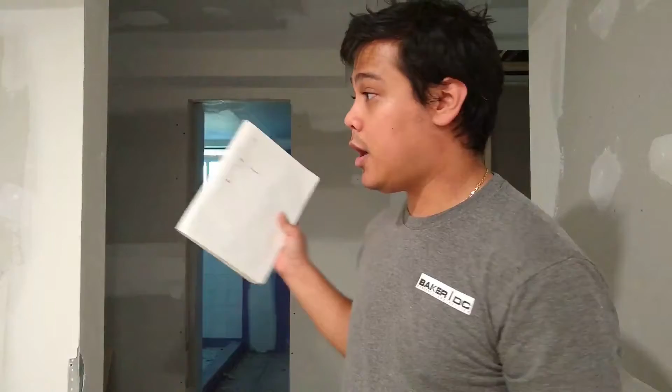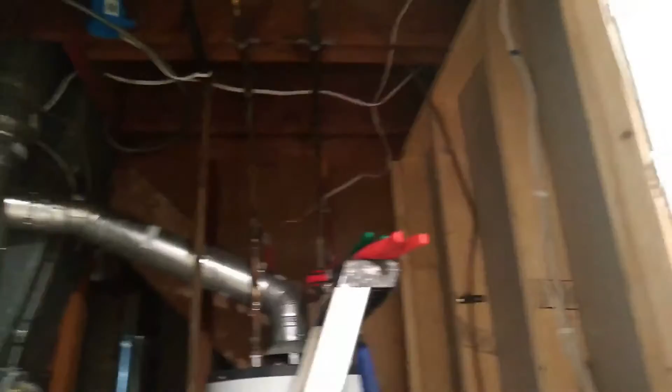The hope today will be to get the other half of the rooms, which are circuits 9, 10, 11, and 12. We're going to splice into this line right there where it crosses. We're splicing into that.

Do not use this as a reference. I am not a licensed electrician. I am not a legal advisor on this type of field. I simply worked in the field for a year, and I had a formal teaching on it, but I'm not any certified person. But this is what I understand. I've had people confirm this for me that are licensed, that are in that field today currently. So do not take my word for it. Do the homework. Call or consult your local electrician, and if you are not comfortable or if you think I am the answer, do not.

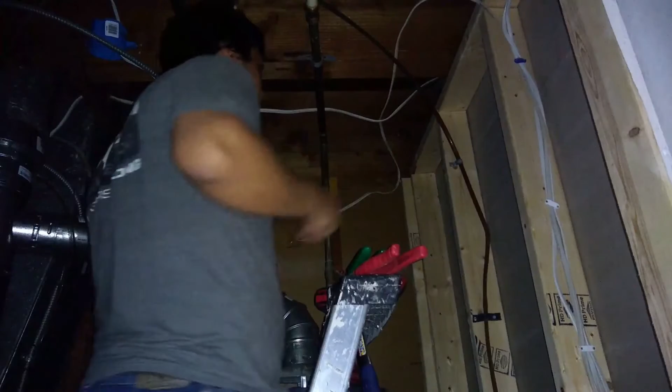Also, if you're going to work on anything in the dark, have a headlamp. I don't have one, and I should get one. Just don't follow the advice of an amateur DIYer, homeowner, whatever. Don't do something you're not comfortable with. Line is dead, and I confirmed earlier that this is my line. So, enjoy a montage of me cutting up wires.

I just cut the wrong wires. Or I shouldn't say the wrong wires. I just cut the three-way wire for the outlets, which tells me power is going in here somehow, somewhere, which means I did not pick the right cable. And now I'm curious, so we'll be back.

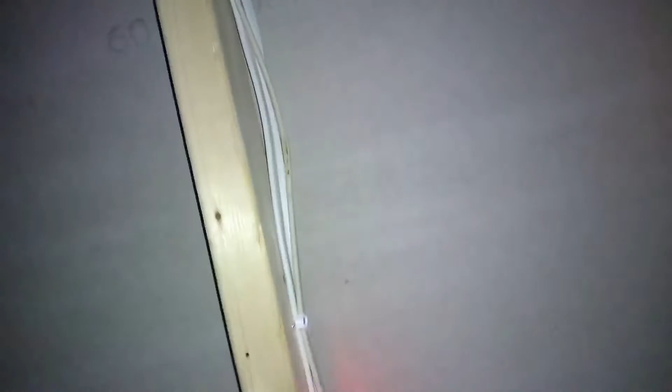Alright, update. So, I just found out this is working. The splice is good. Well, the splice itself actually works, because here's my extra cable that I'm getting power from. Right? Problem. Somewhere in here, it's nicked.

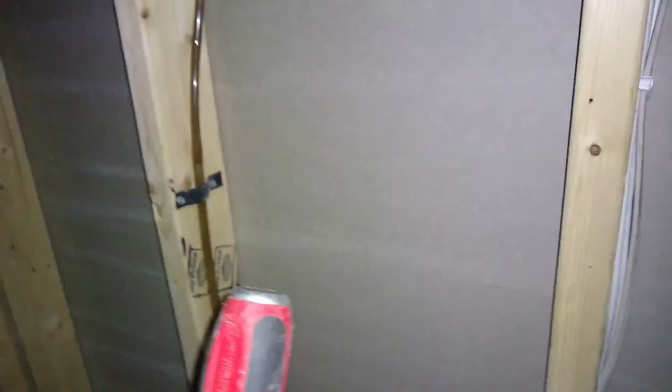So, now comes the part of troubleshooting this garbage of my work, because I'm pretty sure it's just this wire is short, like has a short of sorts. Worst comes to worst, I'll run a secondary wire to that box just to save myself some time. To the light, I mean. So, yeah, let's get to it.

So what am I doing? I am testing a theory. I think I might have pinched the wires too tight. So here's to hoping I don't screw this up. Let's take you for a trip. Plus you give me some lighting. Okay. Light works. We're gonna see if there's power here. There's power. Which means this should have power.

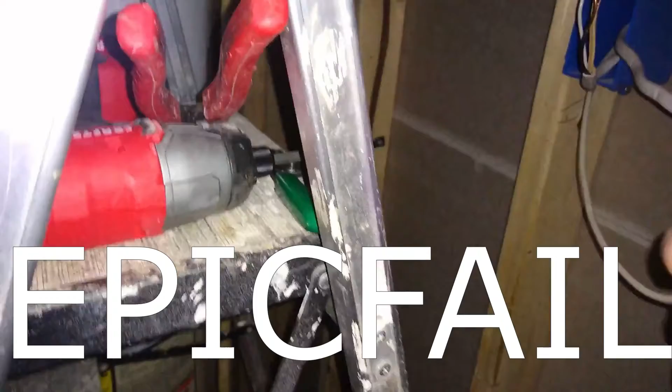Oh. It did? I'm not sure. I'm about to find out. Come back to life. I kinda need you. No. Okay, well, the idea was that it was probably pinched too hard. So.

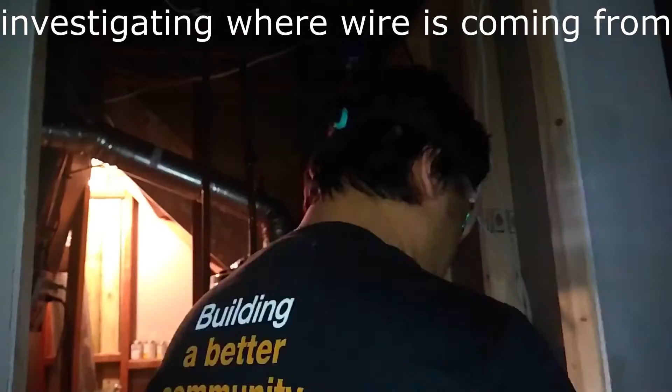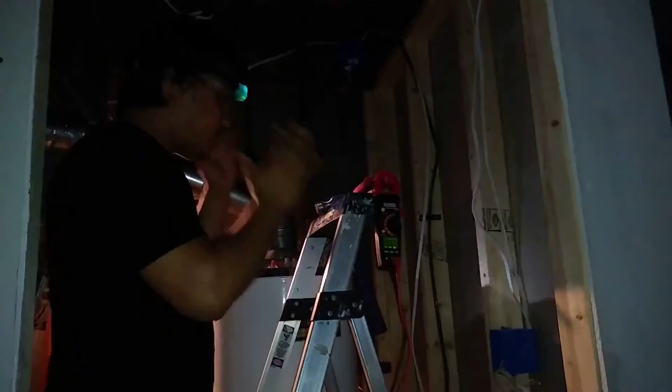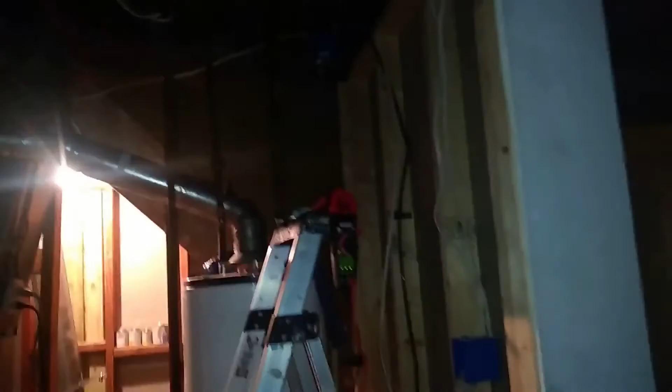Okay. Okay. So, it makes sense. And it just clicked to me. Because, I'm so stupid. Well, hopefully a 15-foot run, this will still make it. If not, I will have effectively wasted 15 bucks on wire. So, I know where the three-way goes. The three-way goes in here. Now, you think that that's that wire, but in fact, it's not.

I had been trying to figure out where this three-way was going. And I've been trying to figure out why I was getting 24 volts. I'm thinking, voltage drop, that doesn't make sense. Why would I get voltage drop? Why am I missing out a whole 100 volts? And it clicked to me finally.

The reason I'm missing 100 volts is because there is a light in here that gets converted to 24 volts. So where that power is coming from is coming off of a converter pack that's actually powering these lights here. That's how they're getting so small power, which, A, that's great. I don't have to worry too much about that. But B, I now know that that's where it's coming from.

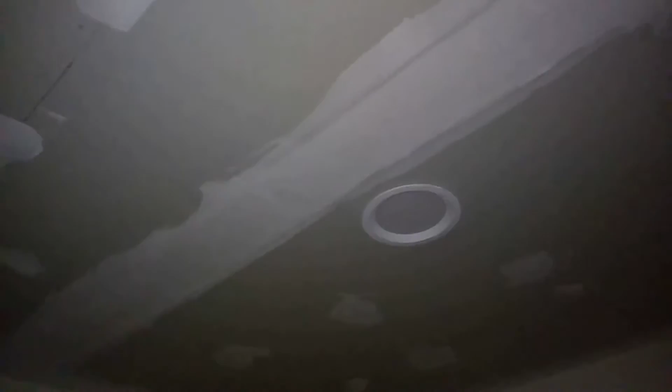It would make sense why I'm getting 24 volts. Because, well, I think it's coming off of a pack there. I'm pretty confident it's coming off of a pack. So.

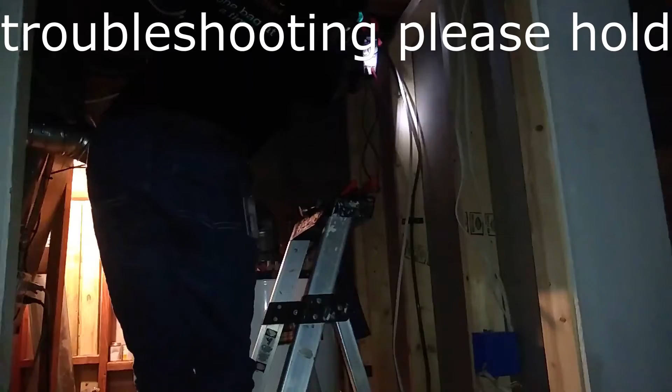Alright, update time, finally, because I'm done, and I know I didn't record it all. It's basically what I was doing to this wire, but I did it to another wire, and I'll show you where. Otherwise, we closed up this junction box because that was pushing a low voltage to a power pack somewhere else, which didn't make sense.

These lights don't run off of 120 exactly, they're running off of an inverter. So yes, you still power them up with a 120 volt wire, to whatever amperage you're using. But they have inverter packs inside the ceilings that the wires connect to, and they just step the voltage down, which explains why I was getting 15 volts on hot and neutral, and 24 volts on the hot and ground.

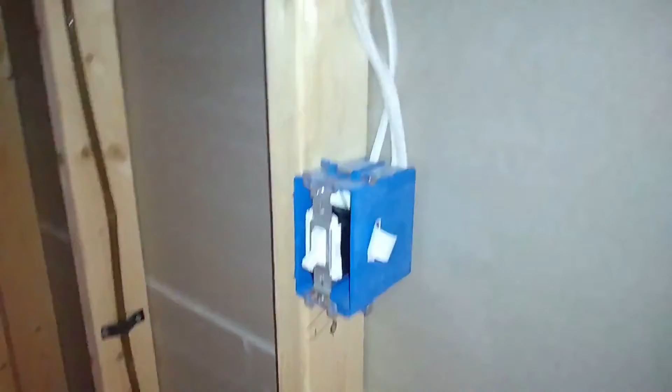So what I did was come over here, I got my wire that I needed, spliced into it, pulled the wire all the way into this little junction box up here. As you can see, it runs down. This now also powers the light that I'm going to put up here, because I need light in here anyways. But this now also traces all the way out here, as I suspected.

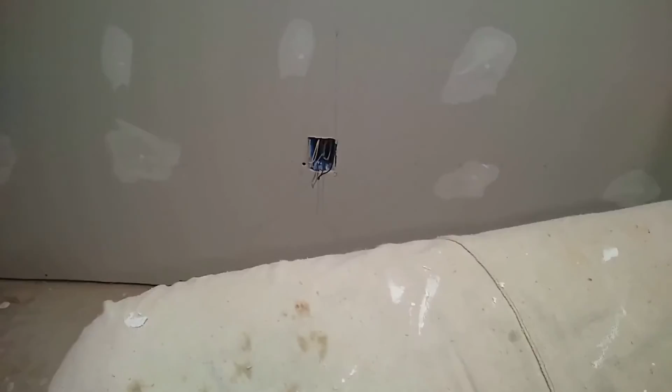This line, it didn't make sense why there were more neutrals and more hots in there than it needed. That should have been a dead end, but instead what I guess the contractor was trying to do was run power from that one line all the way around and then into here, which made no sense, because that's just doing way too much wires.

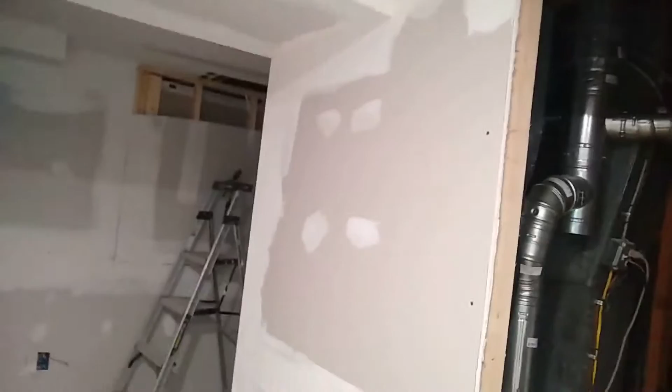And honestly, I'm very disappointed. I wish this would have been better thought out. You see the drywall, you see the patchwork. This was all opened up. Why that wasn't thought through, I don't know. But I'm not going to continue ranting. I'm not an electrician, but even I know to always pick the shortest path if possible, just to keep it simple. As the phrase goes, keep it simple, stupid.

So, yeah. This now, just for proof of concept, right? Where's my voltmeter detector thingy? Or as some people would consider it, glow stick. So this should be hot. And just so that you know, because you're probably thinking, is this on? It's actually in the off position, but just so you can see, there is no current, right?

Nothing. So when I flip the switch, now it's got current. So that also just validates, okay, this isn't off of that switch to power this, thankfully. I'm gonna put it on my little stand here. Realistically, I don't even know where I was going with that.

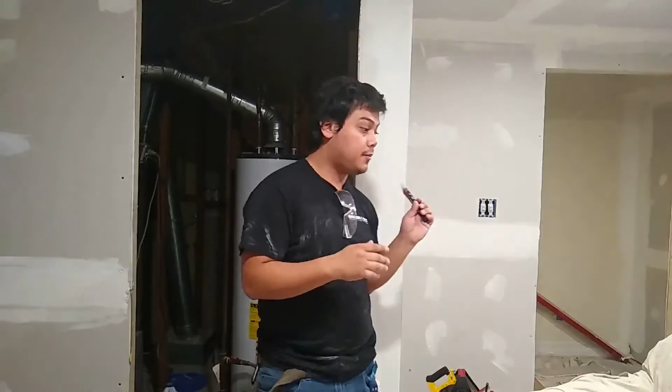Now I remember. Basically, you just want to make sure, as a rule of thumb, and maybe I should have a diagram drawn for this, but for anybody looking to do something simple, like what I did was pull wire, splice into other wires, and that can get very nerve-wracking, and it might not be the situation for you. You might just have an end wire, kind of like this.

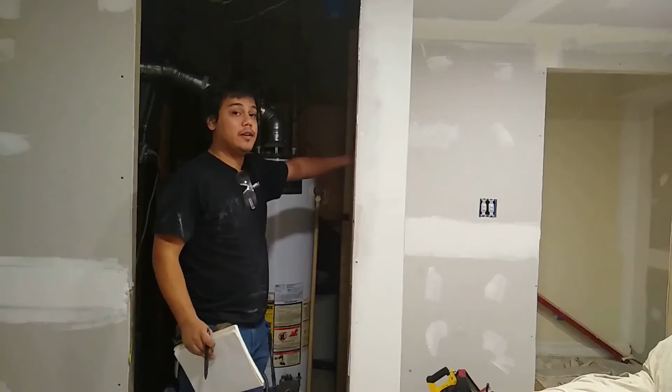Let's say all that power was running here instead, from the back over here, and there was just this end, and you're trying to make sure that you're not toggling power elsewhere that isn't for a light. Let's say I have an outlet from here down, and you're not sure how to power it. It's not as difficult, right?

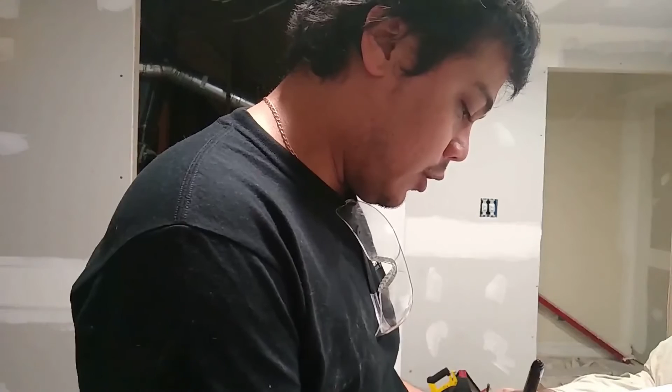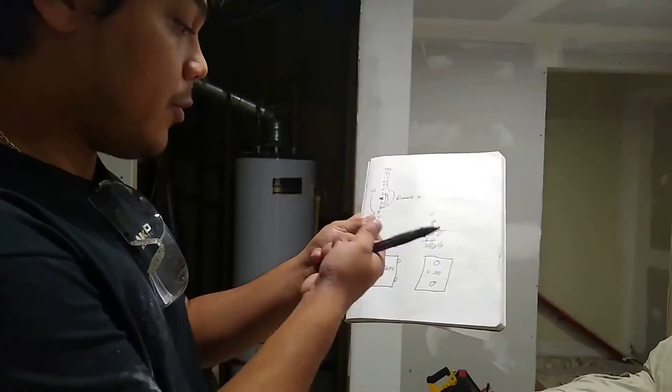We'll do 2 squares. I'll do a little loop here, and then a loop here. That'll be my ground. Then I'll do another square for side representation. So front, side. I don't know if you can see that, so I'm gonna quickly look at the camera. So if you're looking at the switch from the front, the toggle switch that goes up, down, right? Excuse me.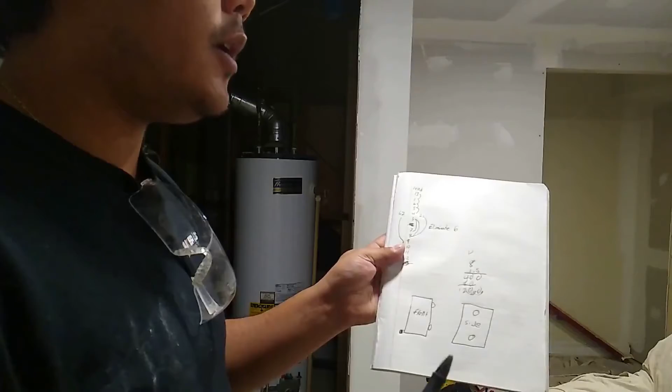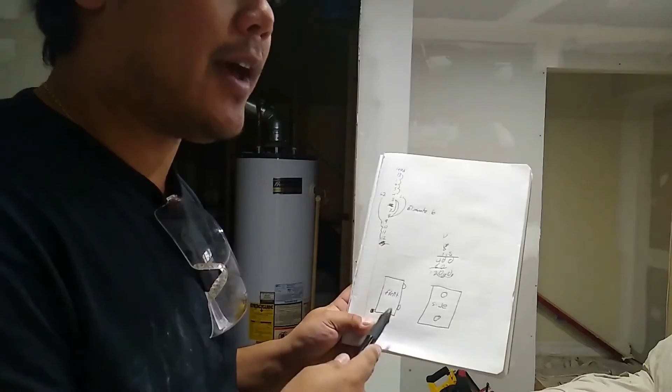General rule of thumb is that you always power top and then you go down. Now, before anybody jumps down on the comments, rule of thumb, always look at the box and just look for obvious signs. A lot of this equipment is fairly obvious to people like me. If I go to the store and buy a switch, it's gonna have obvious stuff.

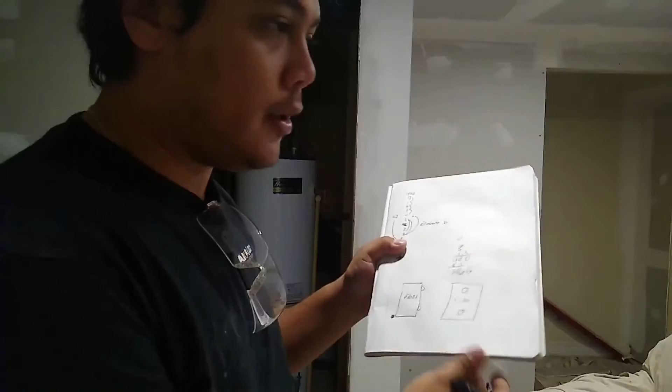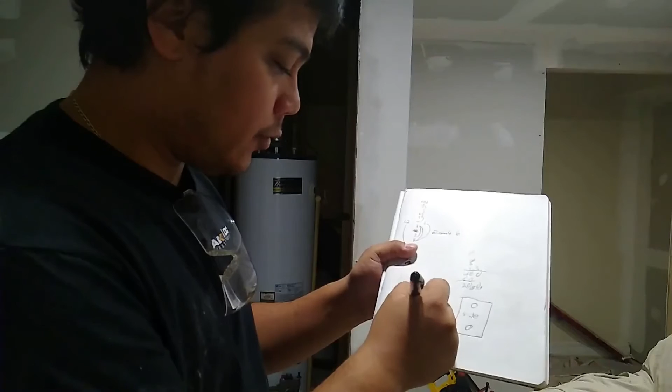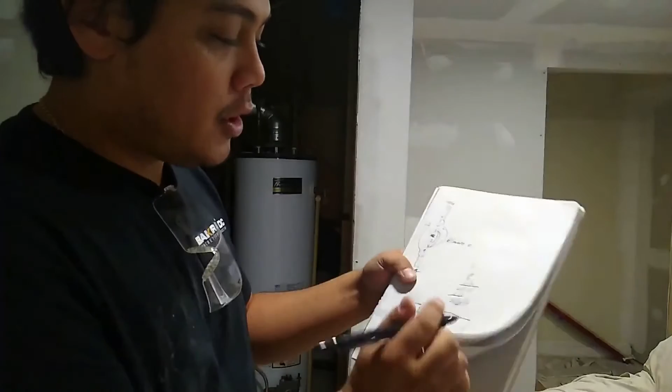For instance, an outlet will have brass screw tops, and that's usually the indicator to put the black wire to the brass tops, and that's for an outlet. For lights, not so much. Most of the time, there's a toggle, so when power is connected, you have your little toggle here. When it's down, the toggle doesn't connect to the other pin, but when it's up, it'll connect to that pin. So usually you'll just have your line come in here, okay?

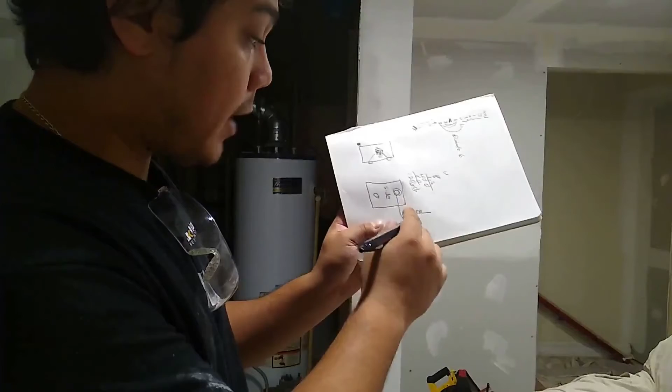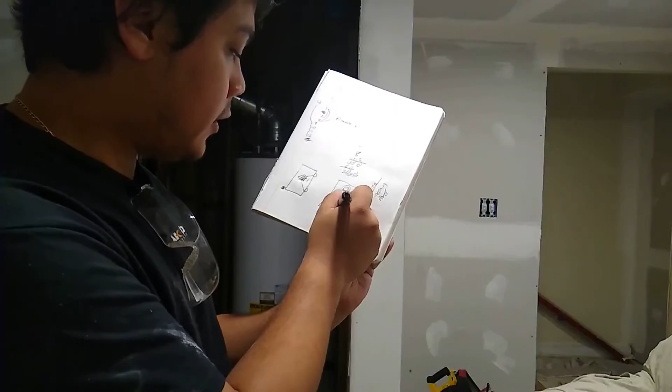And then that'll be your line, meaning that's power coming in or incoming power, right? And then you have this wire heading out, or your load or power sending out, right? And so this then gets controlled by the switch, right?

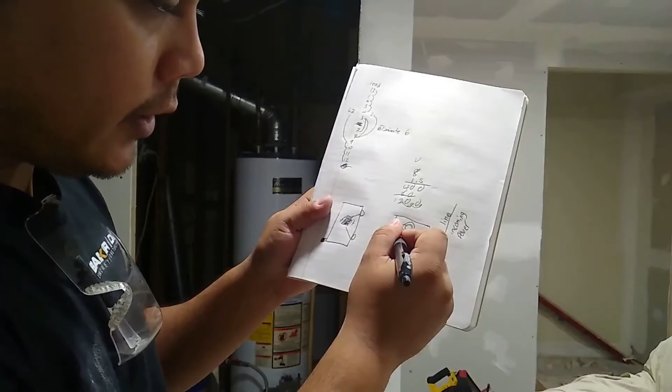If the switch is down here, right, it's not on, and there's a little bar. There's a bar that connects to it, and then another bar, and you can YouTube how a switch looks internally, so you can see how they operate for a better visual representation. But this is the best I can do.

I'm not the greatest artist, but basically when you flip the switch up, this bar here, let's say there's an imaginary bar here. Once you flip it up, it goes touching that contact and then sends the load, or power, out, whatever. And that'll control your switch. This isn't difficult. What we're mostly focusing on is this part, right?

You need to make sure that, let's say there's an outlet that you need to power and you don't want it controlled by the switch, you wire it on this line coming in. You can splice them together, or in some cases, the light switch has similar things. They have screws that you have to tighten down.

You can more than likely push it in, not to use the push-in, there's a sliding portion where you can put the wire through and then tighten it down with the screw, and then you can send this power to the outlet, okay? And that's how you basically wire power into a switch without having the switch control the outlet.

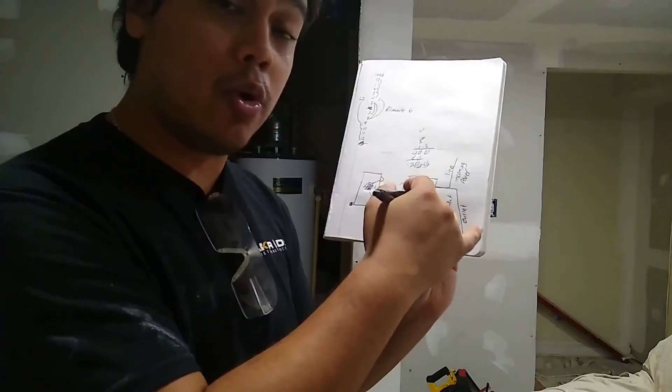And, well, I'm going on a rant here, basically. Effectively, I'm done. I can now call the electrical inspection for a rough-in check, and after that passes, I've basically just got to clean up the basement. I have a potential contractor. I don't know if it'll work out well. It's the hope, right? So I'll be sure to update you guys on that.

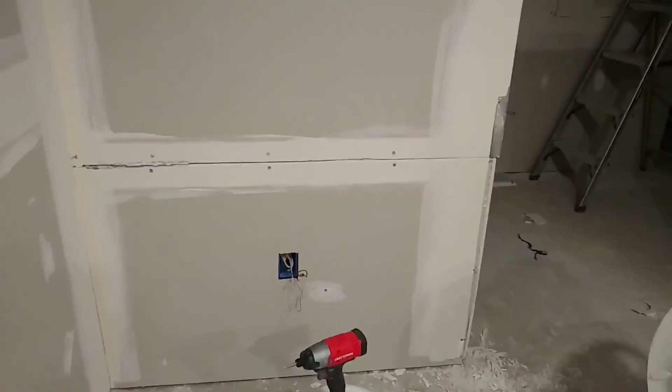I'm just going to take you off the stand because I want to move around now. This isn't the best securing, and obviously the holes here are pre-existing holes. And I quickly learned that it would have been better just to screw in new holes. So for now, it's just holding the drywall. This is so flimsy, I could probably yank it with my hand. And obviously that is a similar concept.